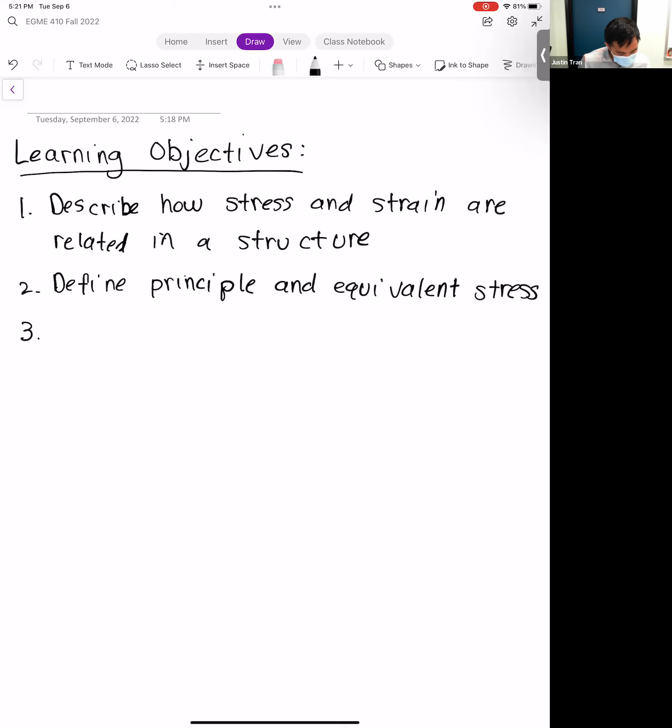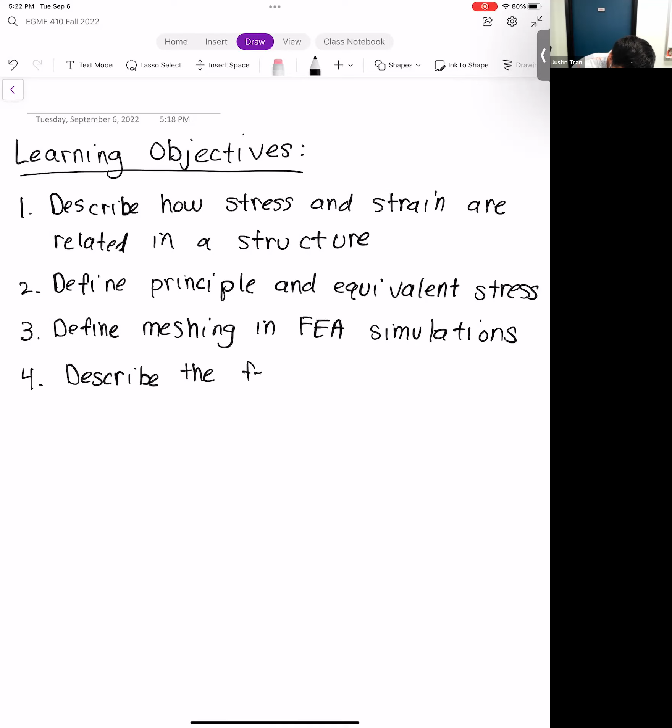I'm estimating for a demolition company. Yeah, that's exactly what I do. I go to the job site, take measurements, double check my blueprints, and then basically figure out, oh, this is the job. They fly you out to places like, oh, this place I've been around, like San Diego. And I just started, and I was kind of hoping not to have to do this already. Less than a minute's notice this time, it's like, bro.

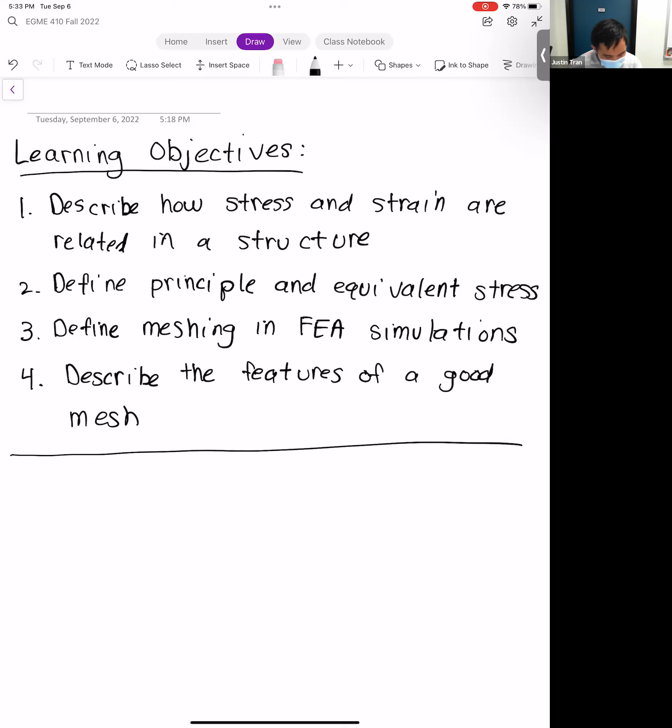Let's go ahead and get started. I'm not going to do everything in this lecture note, it's kind of my generic mechanics and strength of materials notes I use for a couple other classes, so we're going to skip a lot of the beam theory stuff at the end. I want to make sure we cover the concept of stress and strain, since that's more relevant for this class. Once we're done with that, we can move on to meshing, which I think is more fun than this. I think where we last left off, we were talking about stress and the different components of stress.

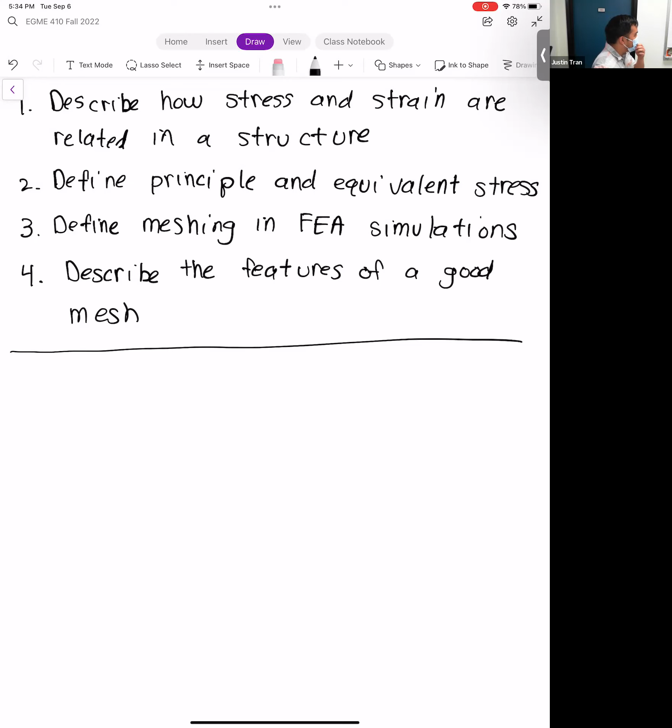Is it on over there? It's a little bit warmer here. Every time I'm in here the AC is kind of on automatic. Is there a thermostat in here? I messed with it because it's too cold. I think the buildings have been having issues, or maybe not issues, I think they've been trying to restrict the power because we're under a flex alert. So I think the AC is on but they're limiting it to try to save power, and I'm feeling a little toasty myself too. I've been here since 4 o'clock, so I think that's the best we can do. Don't run your AC all the time because it's a lot of power, but I think the school is aware of it and trying to conserve power.

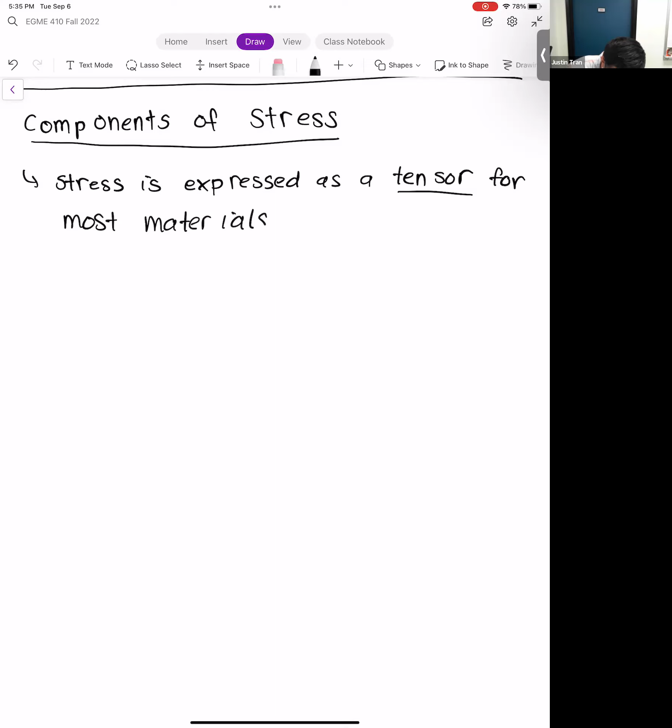Okay, so the stress. The thing I want you to remember from stress from last time is that stress is a multi-dimensional object. What we remember from last time is that stress is expressed as a tensor for most materials. A tensor quantity also basically means that it's stored as a matrix instead of a vector. So what we have is stress is a 3x3 matrix.

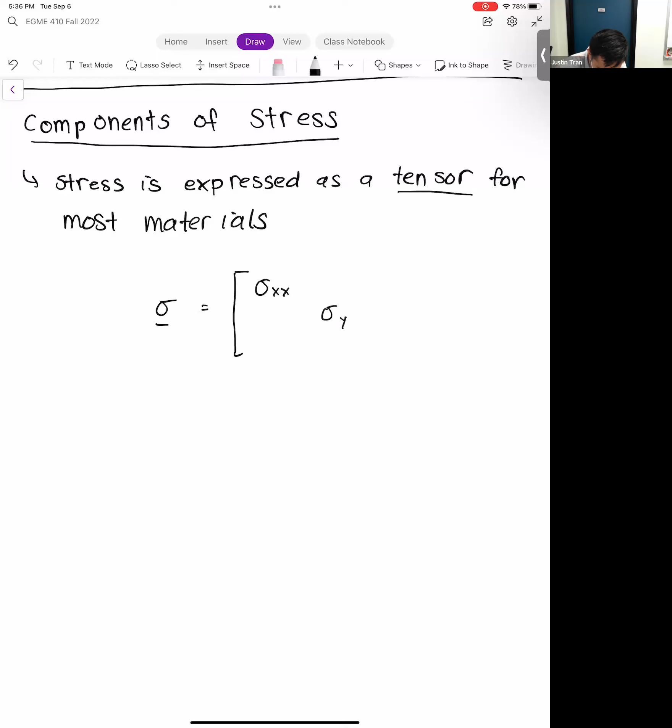On the diagonals of the matrix, we have the compressive components, sigma xx, sigma yy, sigma zz, the normal components. And on the off diagonals, we have all the shear stress components.

For the sigmas, these are the normal stress components. Taus, these are the shear stress components.

And last time, we talked about the difference between normal and shearing stress.

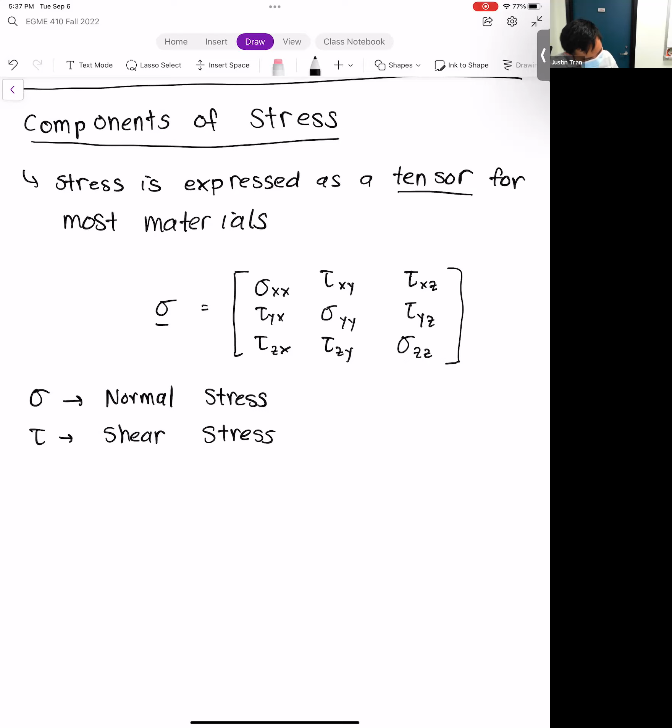I'm bringing this up again because when we talk about stress in finite element simulations, most of the time, and you can recall from activity 1, we're viewing stress as just one quantity. When we viewed the stress field within our plate, it only showed one number along with the color bars. But that oversimplifies what the state of stress is, because stress is actually comprised of all these different components.

Later on today, we're going to talk about what we mean by equivalent stress, what we mean by principal stress, and how that relates to all these different components.

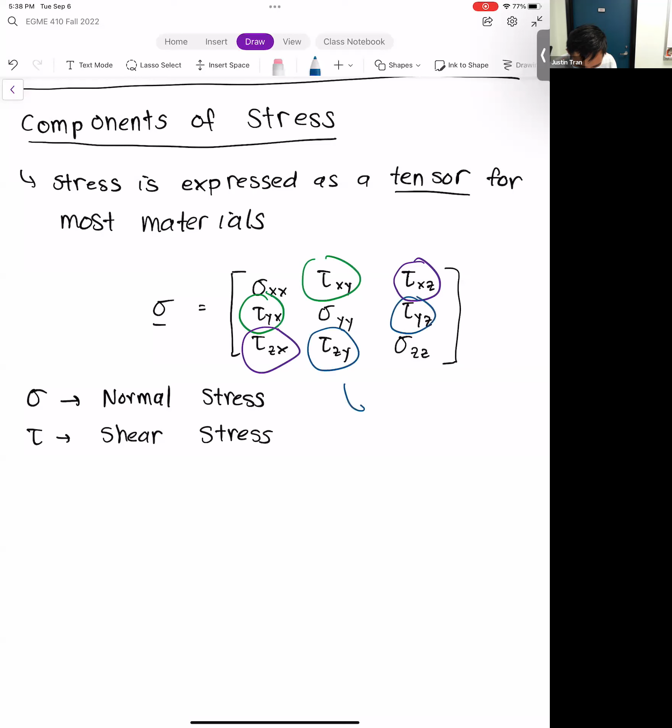In this matrix here, you can see 9 components of stress, but in reality we only need 6 because these 2 are the same, these 2 are the same, and these 2 are the same. The quantities I've circled in the same color are the same because this matrix is symmetric.

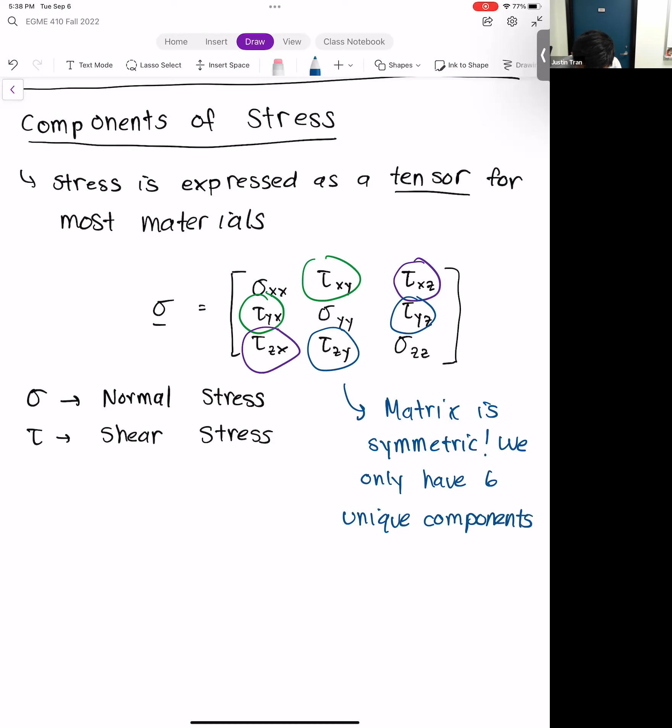So there's only six unique components. But even then, six is a lot. Even for vector quantities like displacement, we're used to those being vectors with 3 components. Considering that every single point within a structure has 6 unique components of stress is a lot, and it's usually too much for most people to view, even with a finite element software like ANSYS.

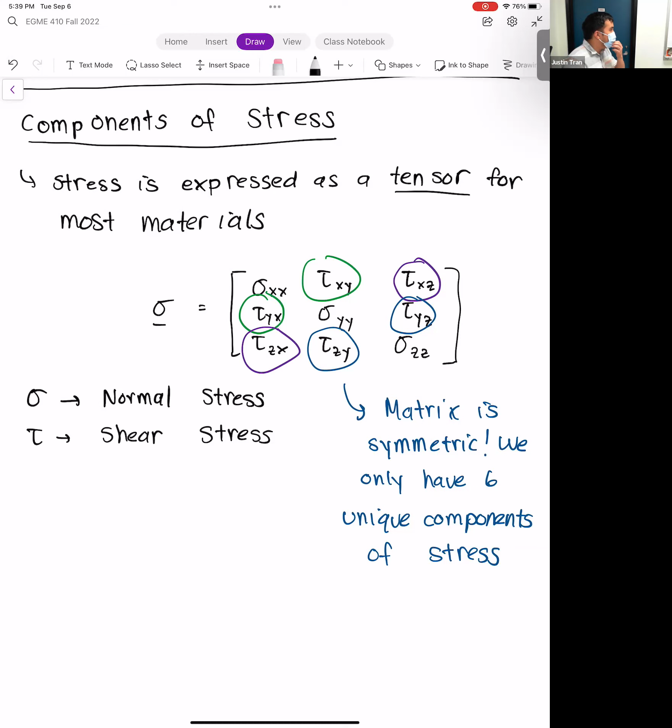So how do we take those 6 components and distill them into a single stress value that we can look at and interpret? There's a lot of math involved in that as well. So let's go ahead and jump right to that.

Let's talk about the idea of principal values of stress and strain.

Just like we said, stress is a complex thing to look at. 6 components is not easy to view at any given time. So for the sake of interpreting results and analyzing our data efficiently, we usually like to take those 6 components and distill them into singular numbers or values that we can view a lot more easily.

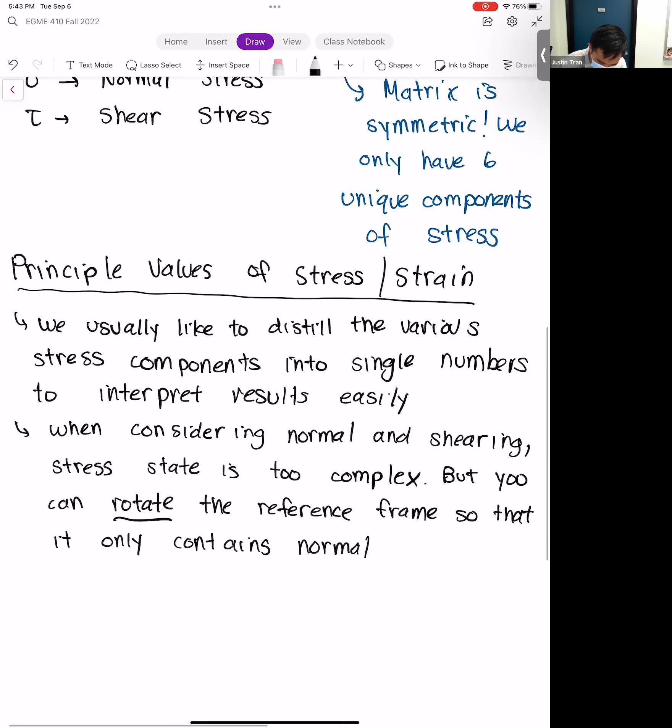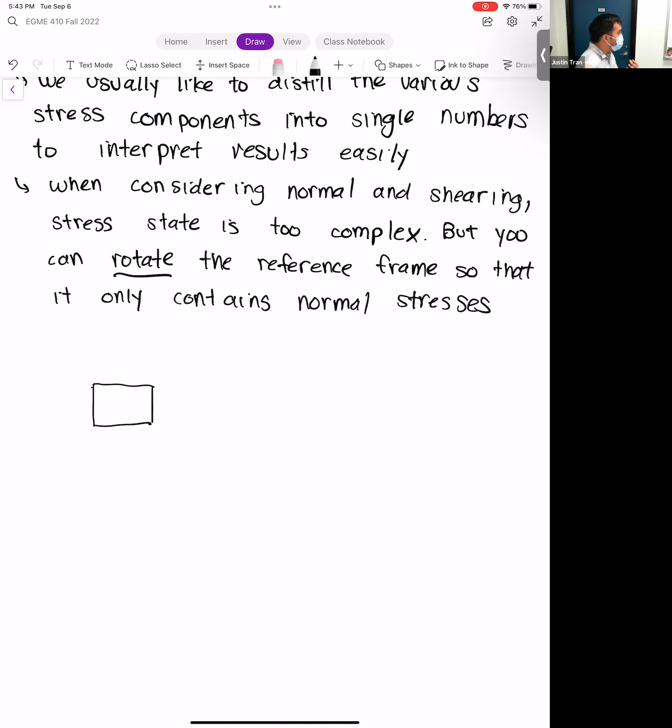I'm going to do an example in 2D because it's easier to visualize, but the same concept applies in 3D as well. If we consider just a small part in a structure, this square could be a very small particle within the structure. Normally, the state of stress here is very complex, so we have normal components.

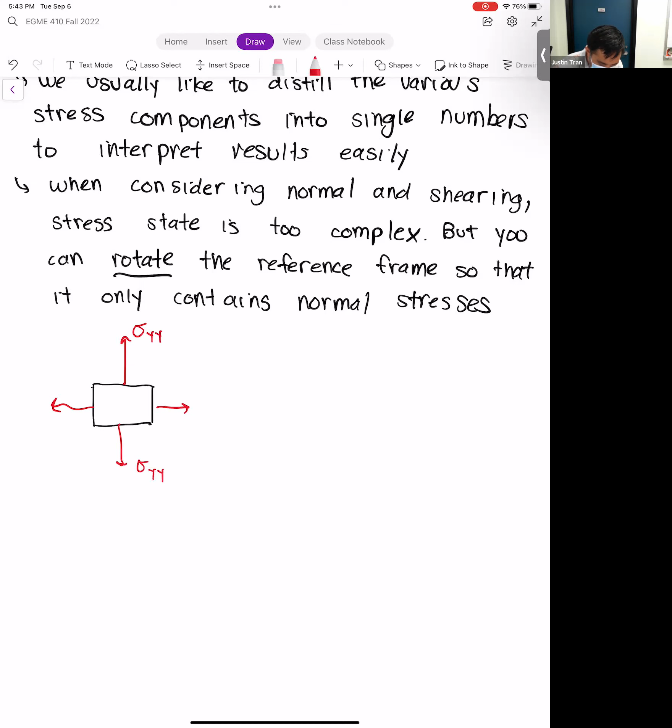This might be sigma yy, might be sigma xx. And then we have the shearing components as well, like this, like this, like this, like this. This might be tau xy, tau yx, tau xy, tau yx. So we have a lot of different stress components that we can deal with.

But if we take this particle, and I drew it as a square on purpose, and rotate it a bit — I did a 45-degree rotation here just to exaggerate it, but it doesn't have to be 45 degrees, and the degree at which you rotate depends on the stress state — if you rotate it a certain way, you can get it so that the exact same stress state can be expressed only in terms of normal stresses.

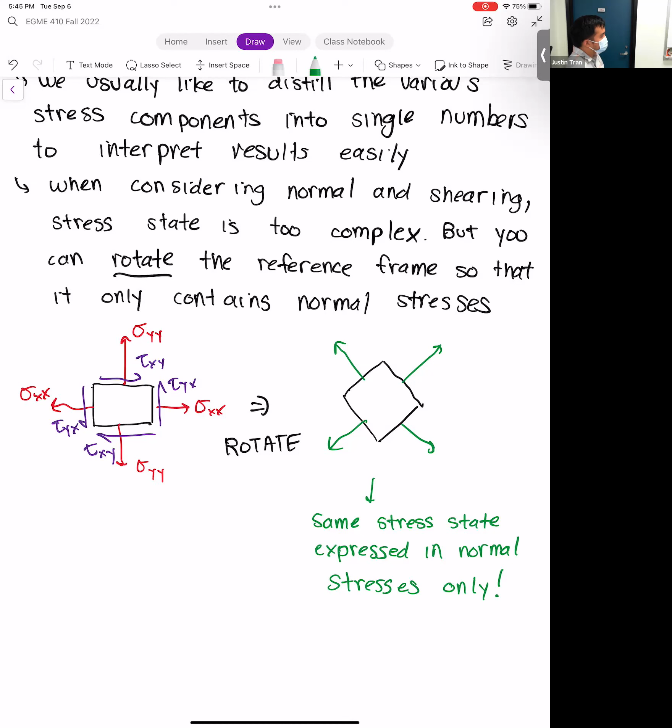I think people get confused when they view this figure, because it looks like the figure on the left and the figure on the right are two completely different stress states. The point of principal stresses and principal strains is that these represent the exact same stress state—they're the exact same object. The only thing we've done is rotate our point of view or reference frame so that the components are in convenient directions.

I always think of that Shakespeare quote about a rose—no matter what you call a rose, it's still going to smell sweet and still going to stab your hands when you try to grab it. This is the same way: if you have an object under some stress, it doesn't matter what reference frame you look at it with, the stress state is the same. It's just how you describe it that's going to be different.

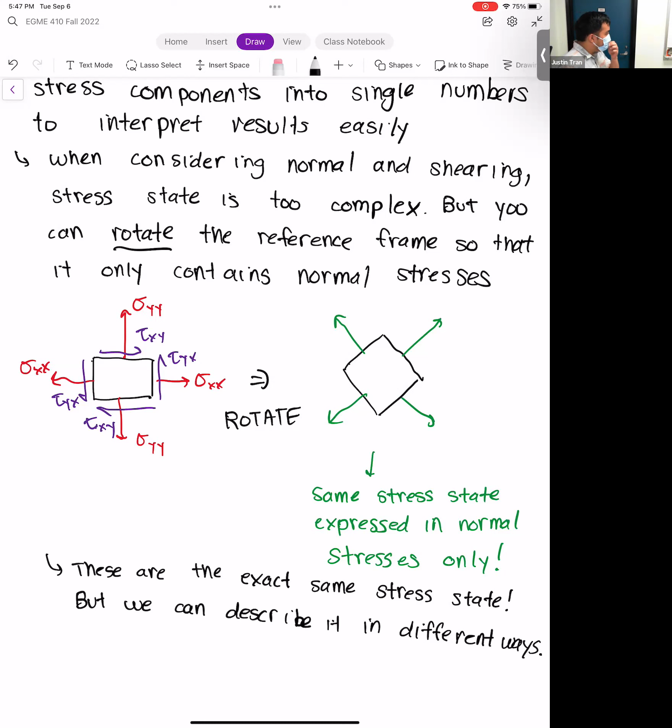It just so happens that some descriptions are a lot more convenient than others. And once we perform this rotation, the stresses that we see here on this rotated one are the principal stresses.

If you're curious about how to actually solve for these by hand, it is possible. Normally, what we have here is our stress state as a 3x3 matrix.

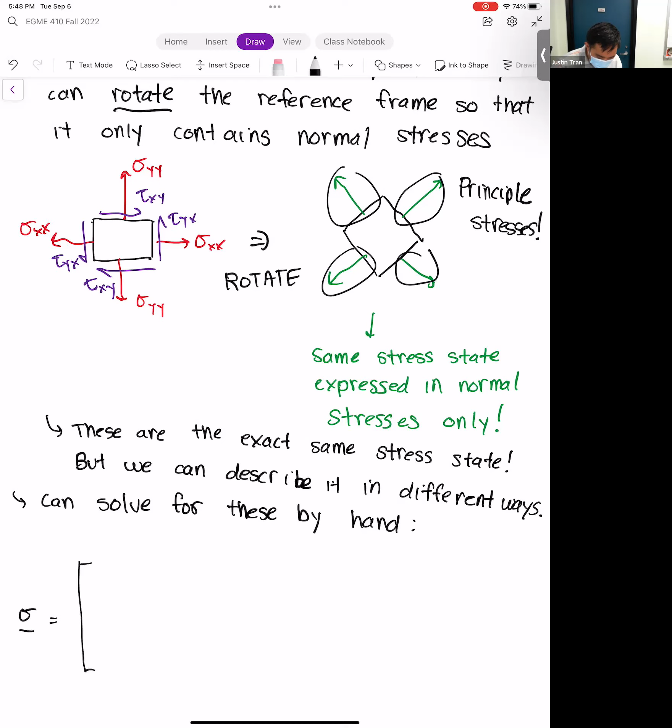I think everyone just got the text that we have an emergency flex alert. This room in particular is even warmer than normal too, because we have all the computers in here, and they're producing heat too, which makes this room extra stuffy compared to other rooms.

So that's our normal stress tensor. In order to find the principal stresses, what we do is solve an eigenvalue problem—we find the eigenvalues and the eigenvectors of this matrix.

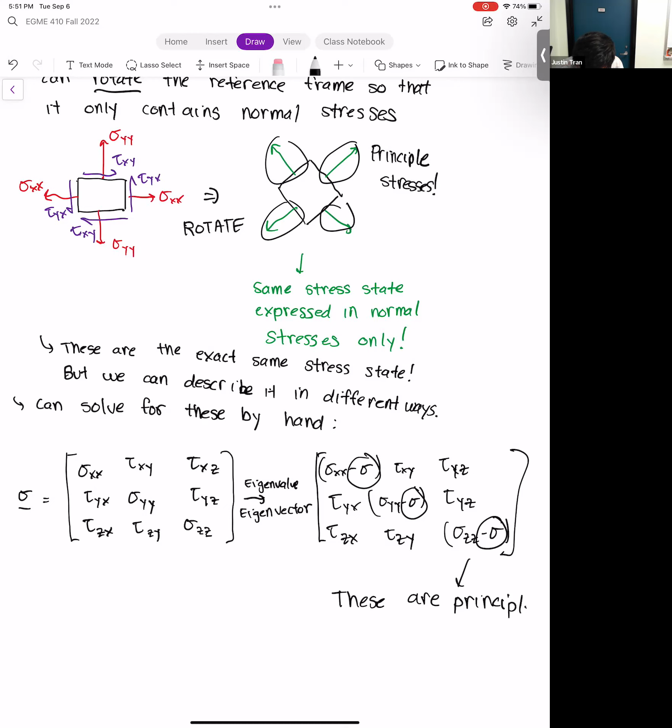So that's the idea behind principal stresses. Basically, to obtain them, we perform a rotation to get the stress state down to only normal stresses, and that's the one we display in our results. So that's one way to distill this complex idea of stress into just a simple number that we can view in ANSYS. Any questions on this? Okay, so that's principal stress.

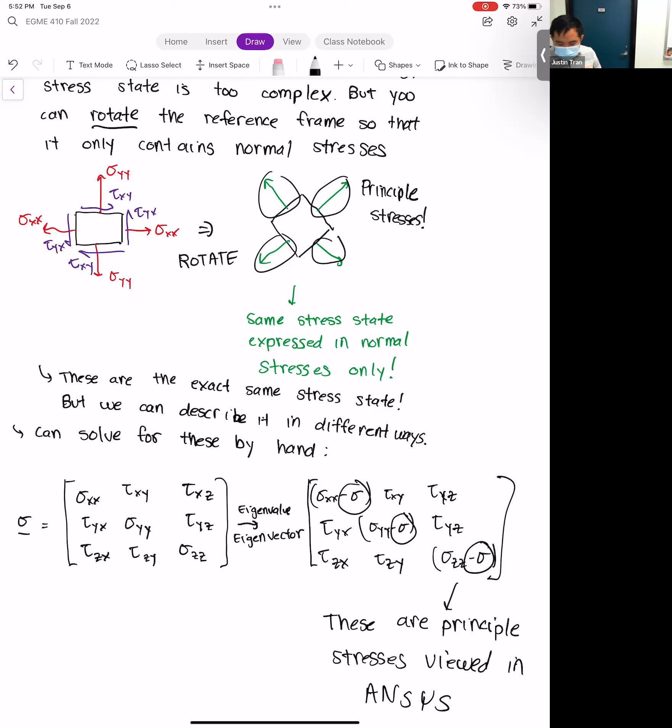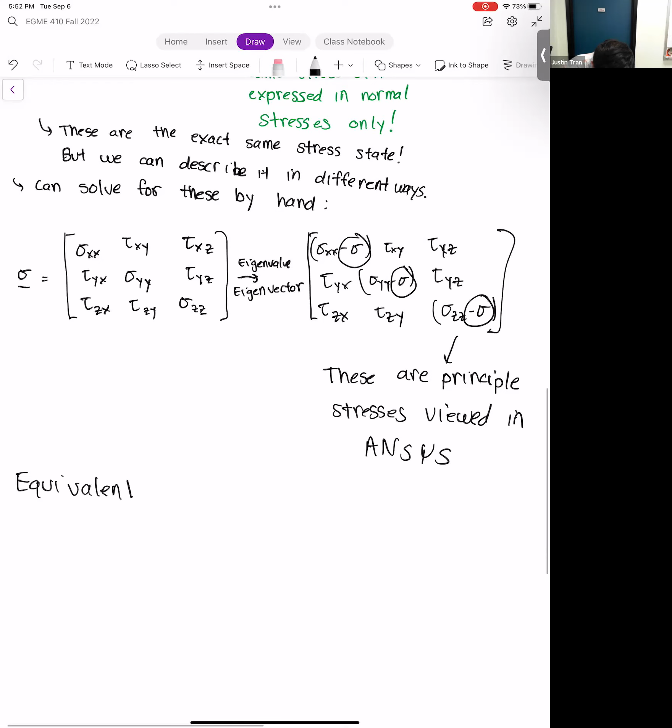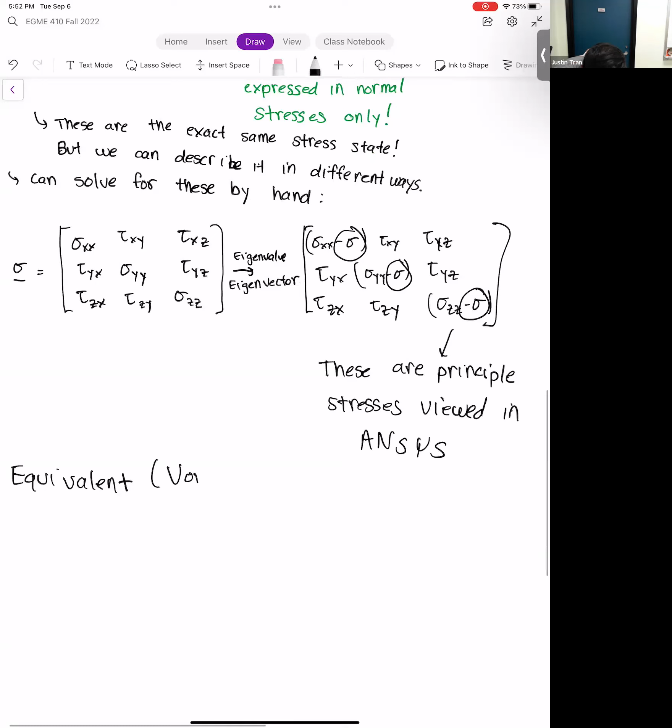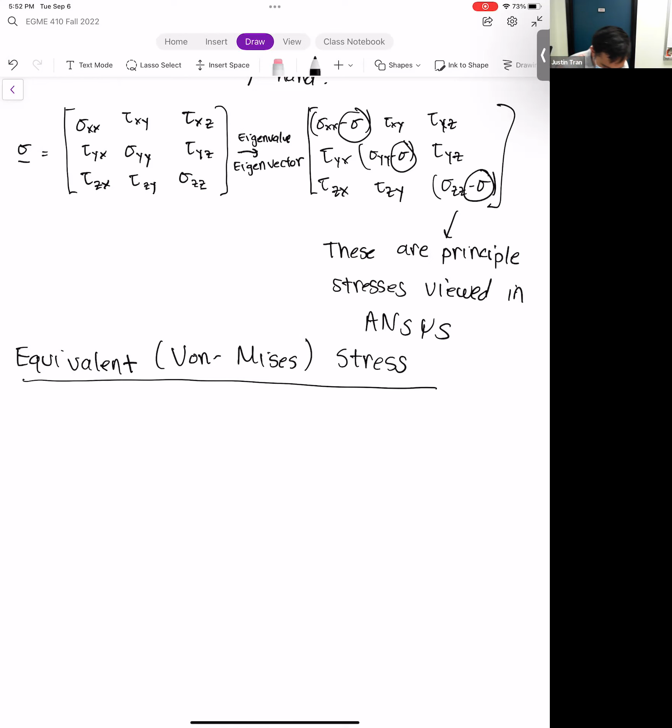So let's talk about equivalent stress. Another name for the equivalent stress that you'll see in ANSYS is the von Mises stress. The equivalent stress is another way to take this complex idea of stress and break it down into a simpler idea, or a simpler number, I should say.

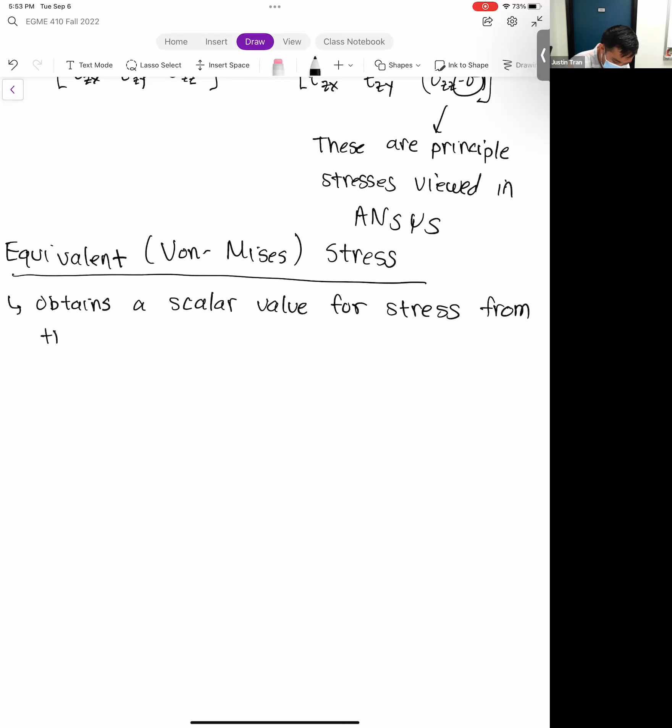Right, so it's the exact same as principal stress - we get our single value. It's just that the way we obtain it is different. The equivalent stress actually has a relatively simple formula, so we don't have to solve an eigenvalue problem. We just take our 6 components and plug them into this formula.

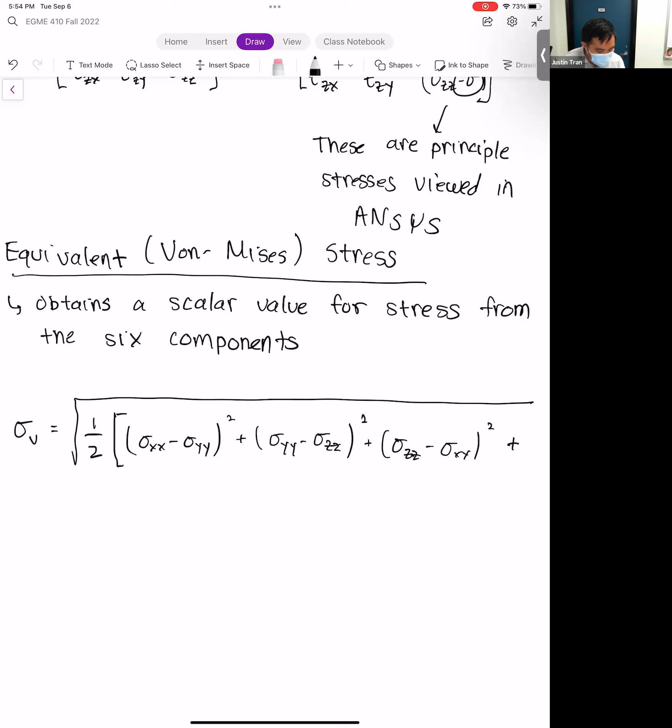The formula for the von Mises stress is given by the square root of 1/2 times: inside this square bracket is all the normal components of stress, sigma xx minus sigma yy squared, plus sigma yy minus sigma zz squared, plus sigma zz minus sigma xx squared. Then we have all the shearing components as well, all under the square root: plus 6 times tau xy squared plus tau xz squared plus tau yz squared.

So it's a rather long formula, not that complicated. But what you can see is that we obtain just a single number for stress. The idea behind this is like the concept of magnitude of a vector - if you have a vector you can find the magnitude using the distance formula. This is kind of the same thing, kind of the 'magnitude,' in quotes, of the stress tensor.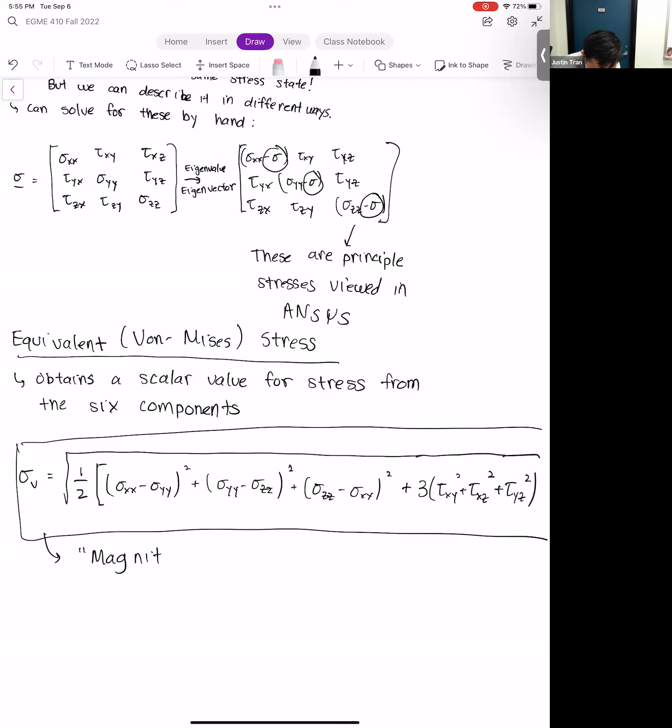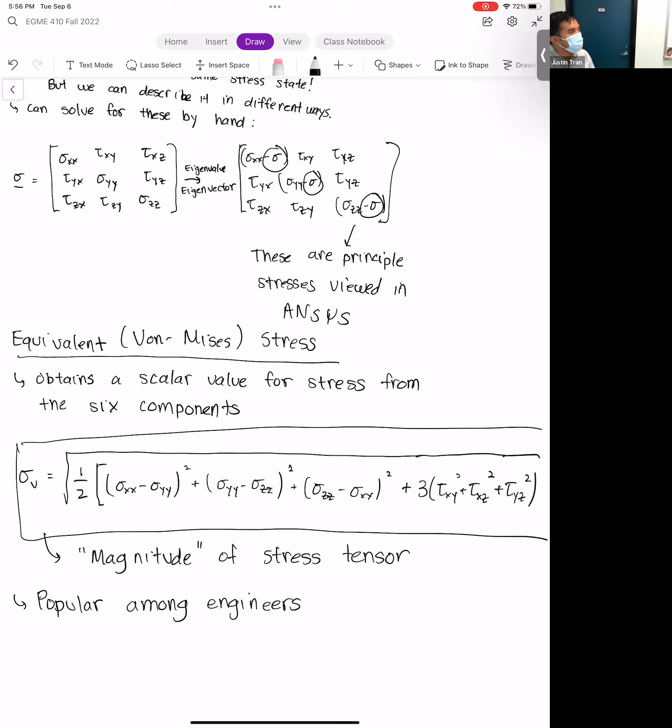For most engineers, the concept of magnitude is something a lot of people understand. So when viewing stress from a finite element simulation, people prefer to use the equivalent stress because that's exactly how it is - they see stress as this multi-component entity, and taking its magnitude is a simple concept most engineers are familiar with. It's so popular that we decided to start measuring things like failure and yield strength according to this equivalent stress.

On Thursday when we do our activity, I'm going to give you a part, and in addition to the material of that part, I'm going to tell you at which equivalent stress the part is going to break. So what you're going to do is run the simulation, compute the equivalent stress, and then see if that equivalent stress exceeds the yield strength that I give you.

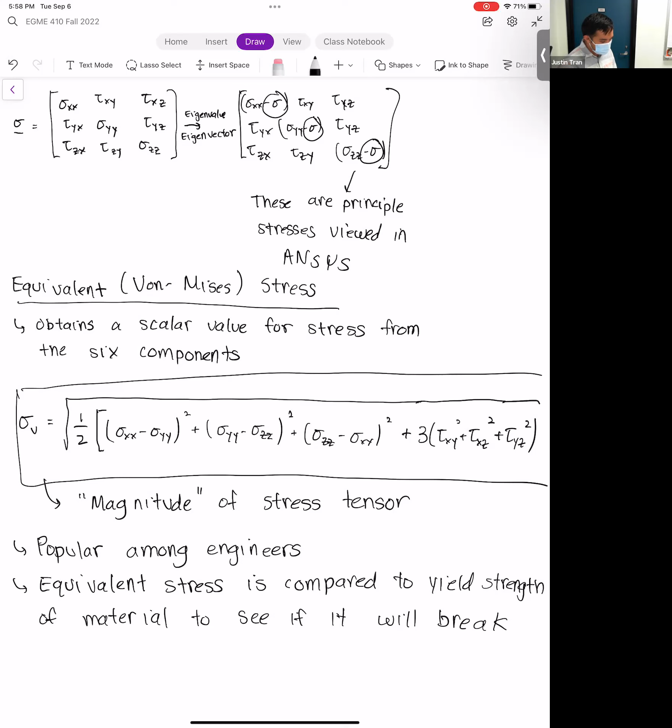A lot of times, if you're doing failure analysis or stress analysis in ANSYS, the one you're going to want to look at most of the time is equivalent stress, because that's going to tell you with pretty good accuracy if the part is going to fail or not. That's why, for most of our activities, I'm going to ask you at the very least to show me the deformation field and also the equivalent stress field, because that shows the magnitude of the stress.

Any questions on equivalent stress? I'm not sure what you mean by Tresca. That's someone that took Dr. Carp. Oh, okay, I see.

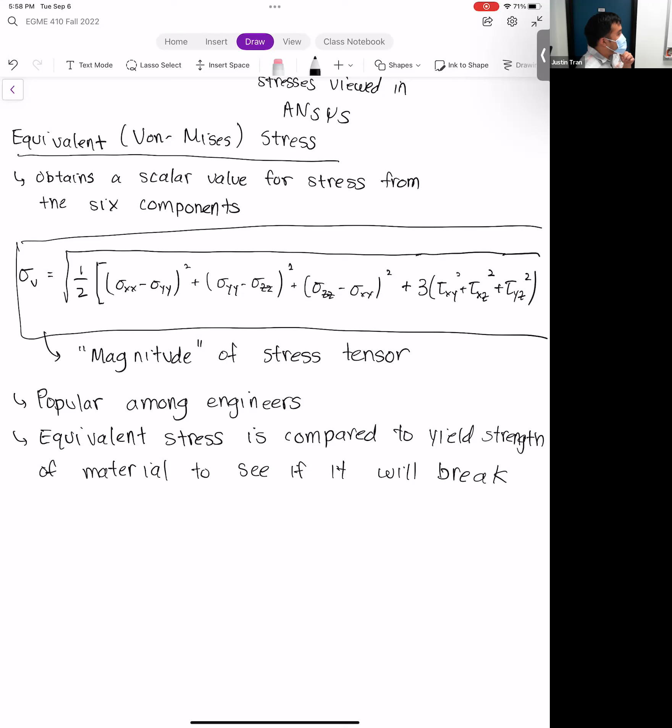It wasn't bothering me last class, but now that someone mentioned it this class, it's starting to get to me a little bit. I'm kind of sweating up here.

Okay, so the last thing I want to go over in mechanics and strength of materials is stress-strain relationships. I think at the end of class on Thursday we started talking about strain a little bit - we talked about how the strain inside of a material is directly linked to the amount of stress that it experiences as well.

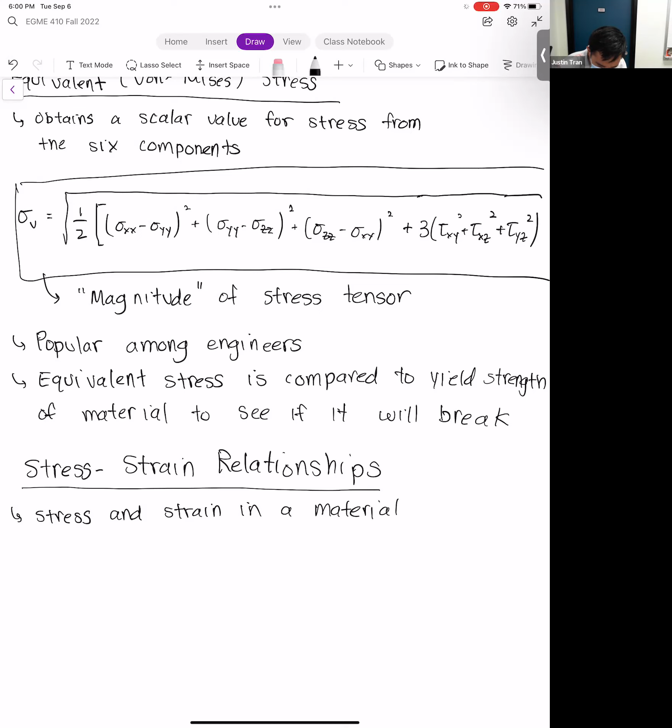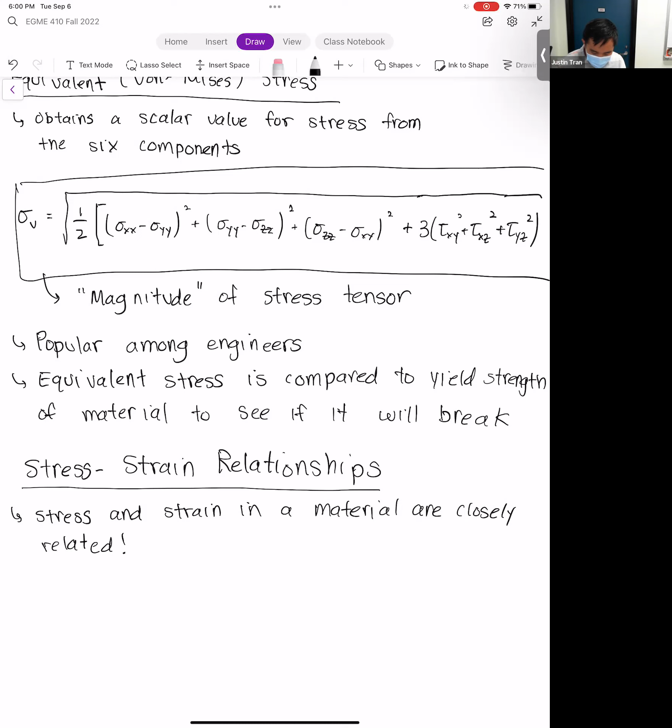And the degree of their relationship depends on what kind of material you're looking at. And so for the simplest case, and the case that we'll be looking at a lot in this class, is a linear relationship.

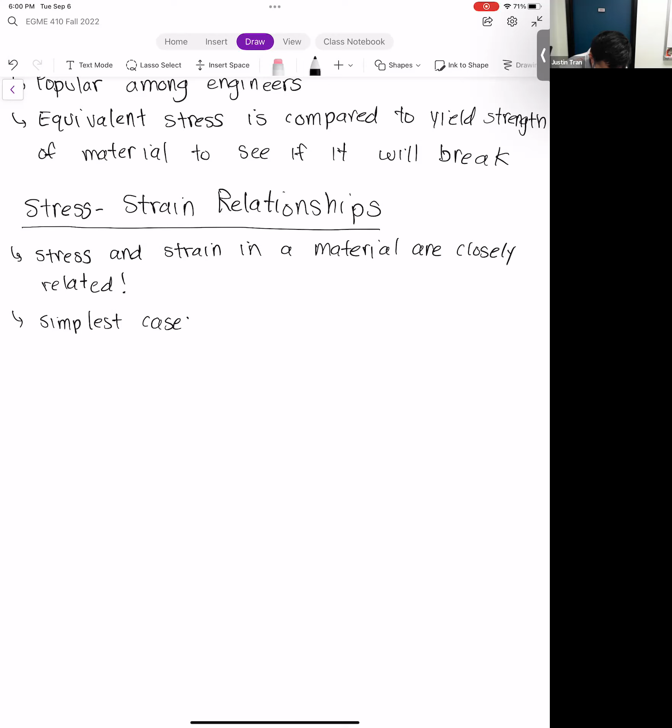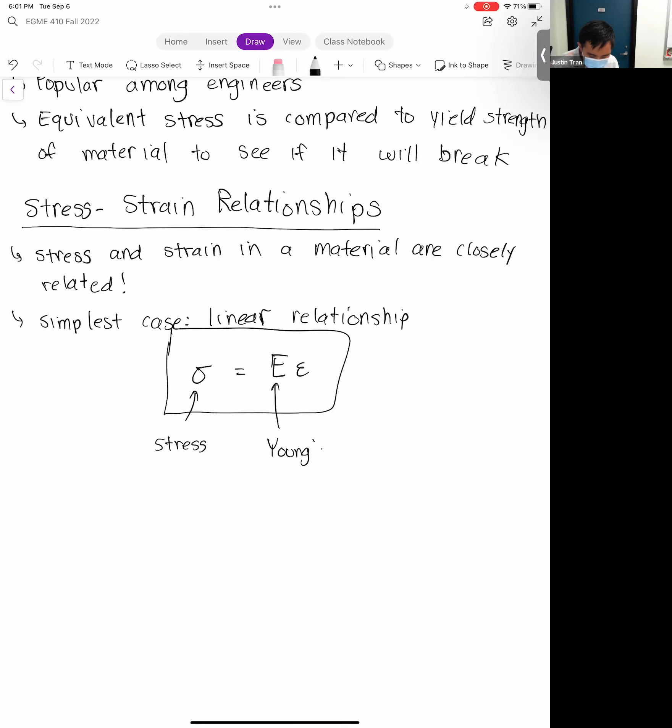Under a linear relationship, the stress and strain are related by just a straight line. This is probably the equation you've known the most: stress is equal to E times epsilon, where sigma is the stress, E is the Young's modulus, and epsilon is the strain.

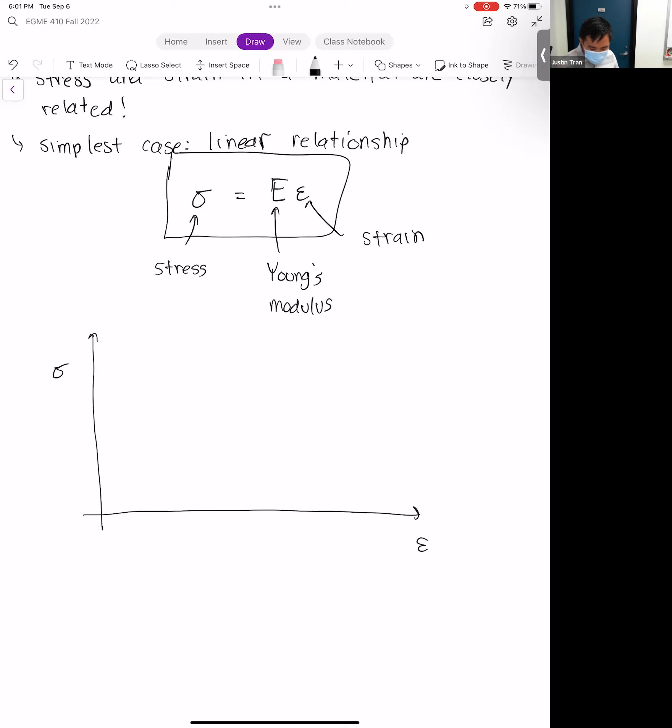A linear relationship like this leads to a linear line. So if we draw a stress-strain curve, we have sigma on the y-axis and strain on the x-axis, and all we have is a straight line where the slope of this line is E.

Just like we talked about last week, when you have a linearly elastic relationship like this, that means the deformation or strain you see in the object is directly proportional to the amount of load that you apply.

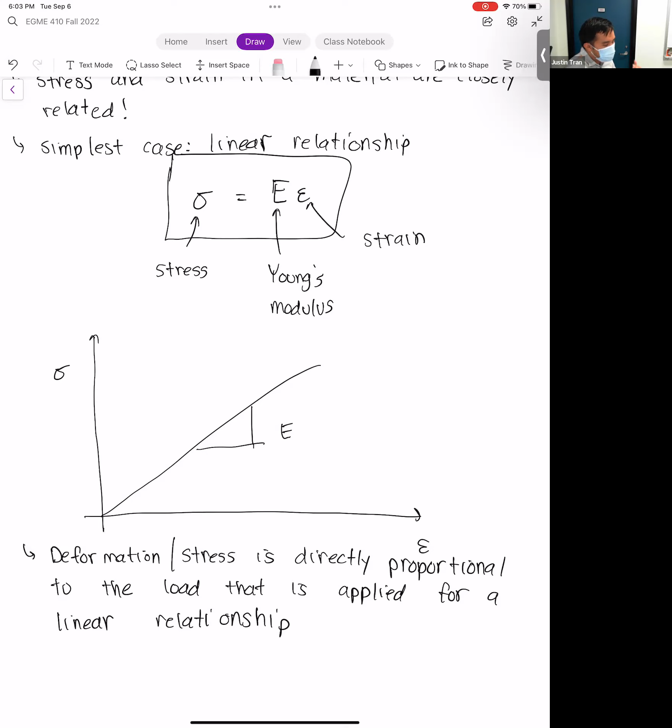If you apply double the load, you'll get double the deformation, double the load, double the stress. The same thing for half and a third and stuff like that. This type of relationship works well in certain situations.

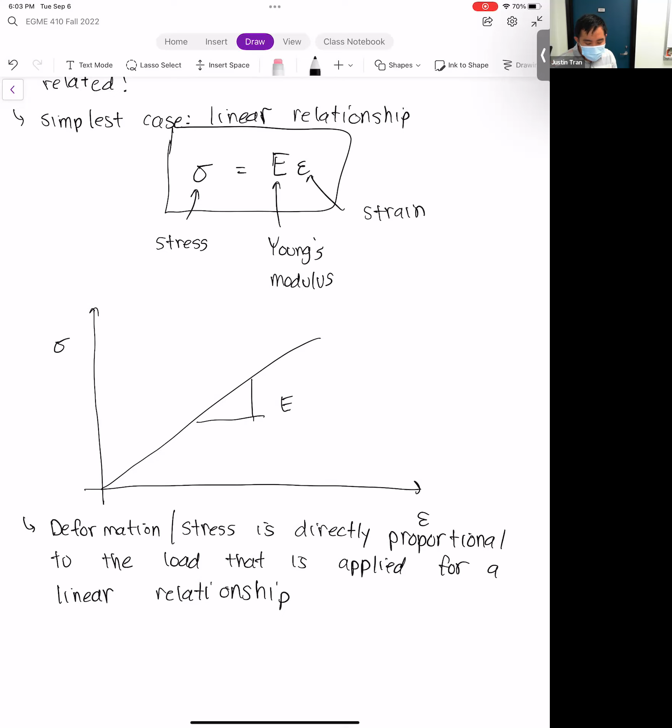Luckily for us, a material we use a lot in engineering is metals. Metals are typically assumed to be linearly elastic. So if you're using something like steel or aluminum, that metal is going to behave just like a linearly elastic material.

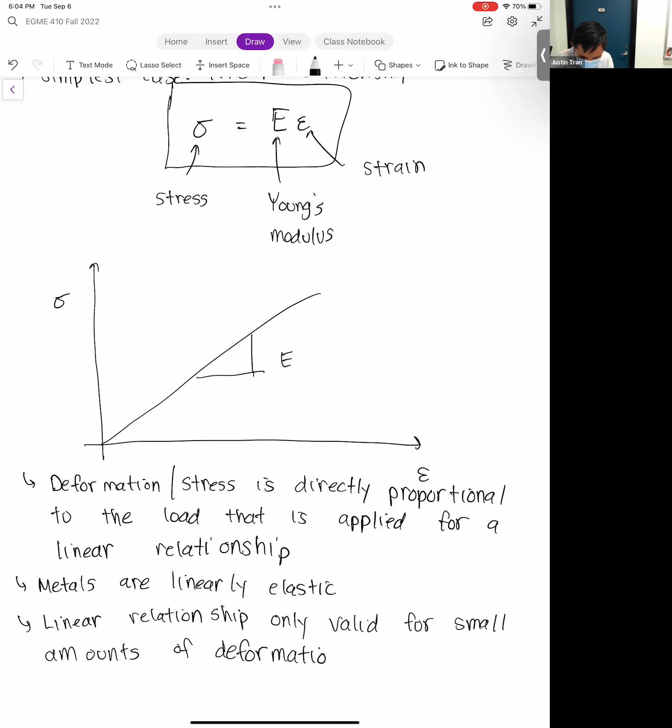But even for metals, this kind of linear relationship is only valid for small amounts of deformation. Once you get to higher levels of deformation, what you start to see is plastic deformation, which gets a bit more complicated.

Let me just write down about plastic deformation, and then I think that's all I want to review about strength of materials, and then we can start talking about meshing.

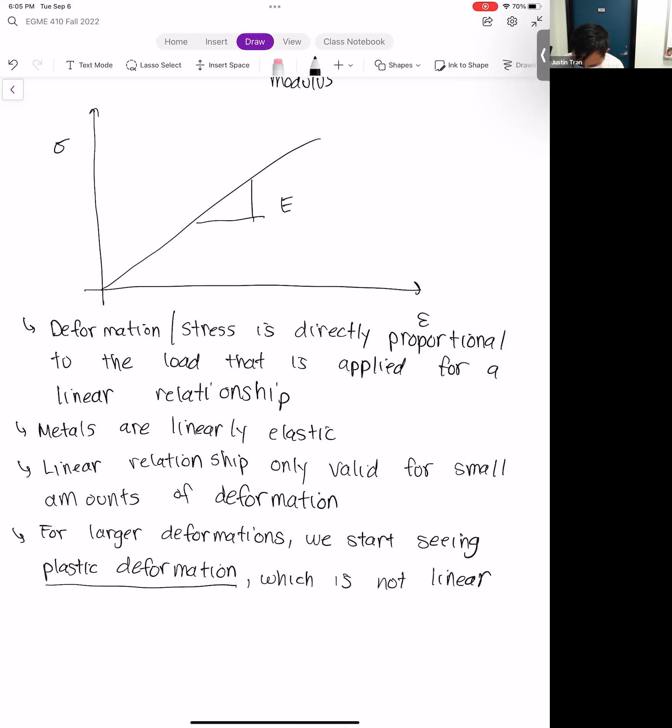In ANSYS, there's actually a setting where you can turn on what's called large deflections. When you turn on the large deflection setting in ANSYS, it'll start to account for things like plastic deformation, where the stress-strain relationship is no longer going to be linear.

The only thing with large deflections is that when you turn it on, it actually increases the cost of your simulation. For the cases we're going to look at, that increase in cost is pretty negligible, and you probably won't even notice it. But for much larger cases, it starts to make a difference.

So it's usually a pretty real decision people have to make if they want to turn on large deflections, or just how much complexity they want to put in their simulation relative to the cost.

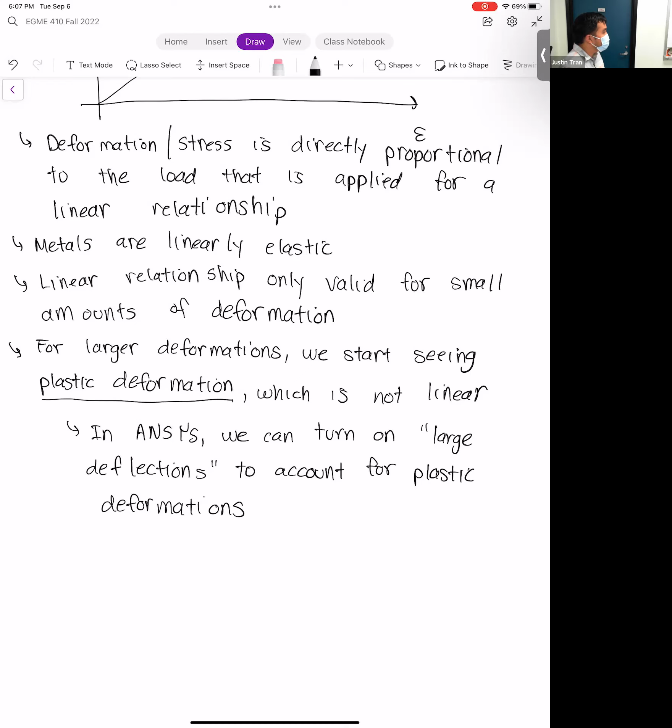Any questions on this stuff before we move on to meshing? So the only reason you wouldn't want large deflections enabled is so it's easier to run.

Exactly. We'll talk about cost a lot more once we talk about meshing. But for the types of simulations we're going to run, turning on large deflections might be the difference between waiting 10 seconds for your simulation versus waiting 15, which is pretty negligible for most people. But for much larger simulations with millions of elements, it could be the difference between a few hours to a few days, which is a lot more significant.

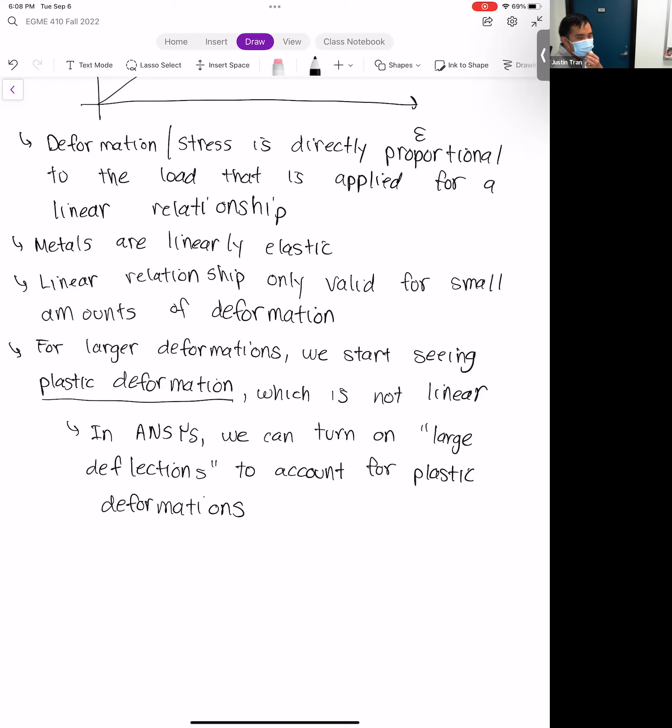Okay, all right. So let's go ahead and move on. The next thing I want to talk about here is meshing.

For this lecture, and I think we'll probably do meshing for one more lecture, we're just going to go over the basics of meshing, just enough to introduce the ideas to you and get the basic concepts down. We'll revisit meshing later in the semester, because there's quite a lot to talk about with meshing. But first, I just want to talk about the basics, what you're looking out for, what a good mesh looks like, and some of the basic settings you can use within ANSYS.

So we're shifting gears quite a bit. We just finished talking about strength of materials, and now we're going to a very heavily FEA-specific subject. Let's remind ourselves what meshing is: meshing is the act of taking a complicated geometry and breaking it up into much simpler shapes.

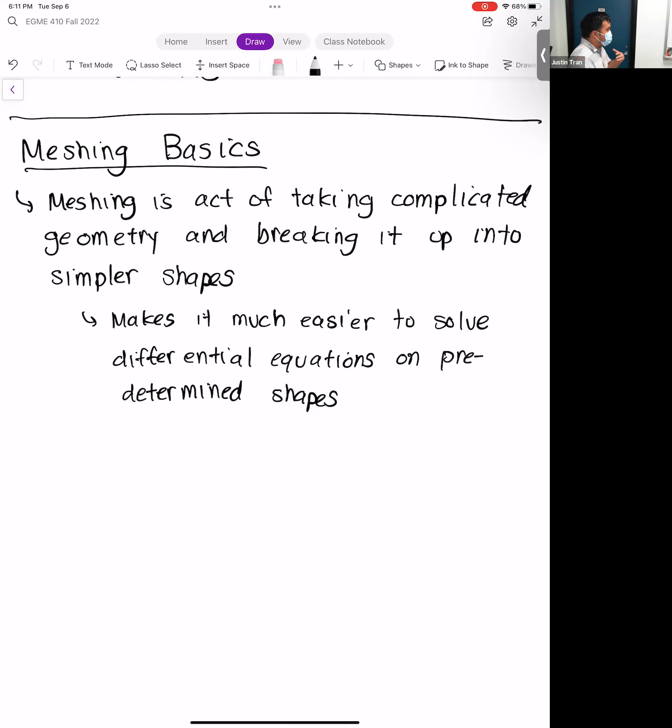Because of how meshing is, there's no one best way to mesh an object, and to that end, there's no perfect mesh for an object.

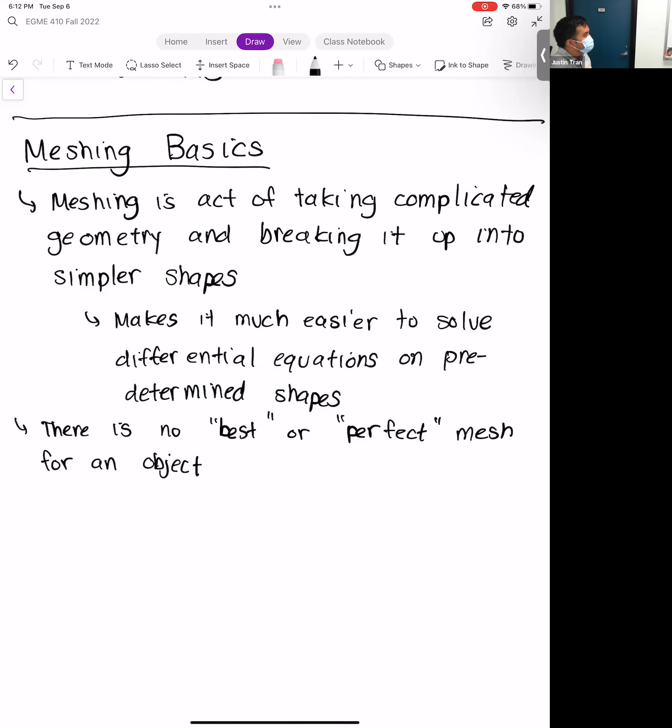Because the mesh that you generate is not just a function of the geometry itself. It's a function of the type of analysis that you want to run, how much computational power you have, and how much accuracy you want. So there's a lot of factors that go into what a good mesh is. But with that said, even though there's no best or perfect mesh, there are meshes that are better than others.

I had a math teacher in high school who was very stingy with his compliments, but the best compliment he would give is to tell you that this is better. I remember he would be checking my homework and say, 'Wow, Justin, this is better than what you did before.' He had a stamp that said 'This is better,' and he would stamp my homework with it, in sparkly letters. I still remember that to this day.

Again, meshing is a very rich topic. You could probably spend half or three-quarters of a semester talking about all the different shapes, intricacies, and nuances. It goes deep. Honestly, I have a lot to say about meshing in general, but this is a limited class, so I'm just going to give you the most important details. Just know that it goes really deep. If you really want to talk to an FEA nerd, talk about meshing—he or she will have much to say about it.

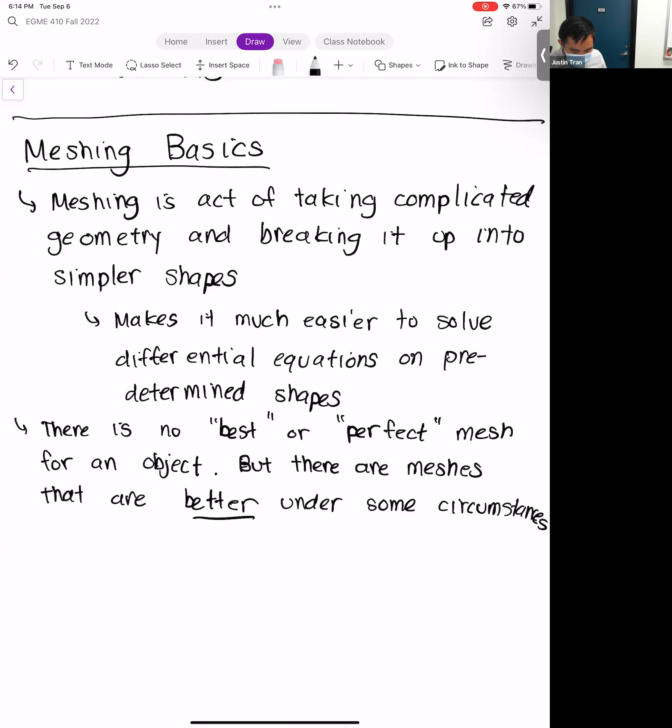Today we're going to start talking about what are the characteristics of a good mesh, and what exactly our goal is in terms of meshing.

As complicated as meshing is, I think it's pretty easy to come up with a definition for what a good mesh is. To put it simply, a good mesh is one that will give you an accurate finite element solution result with as little cost as possible.

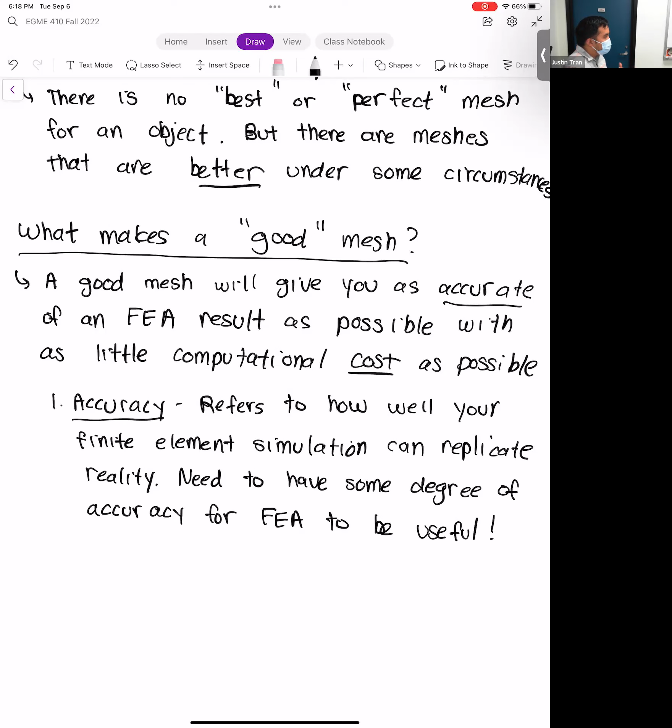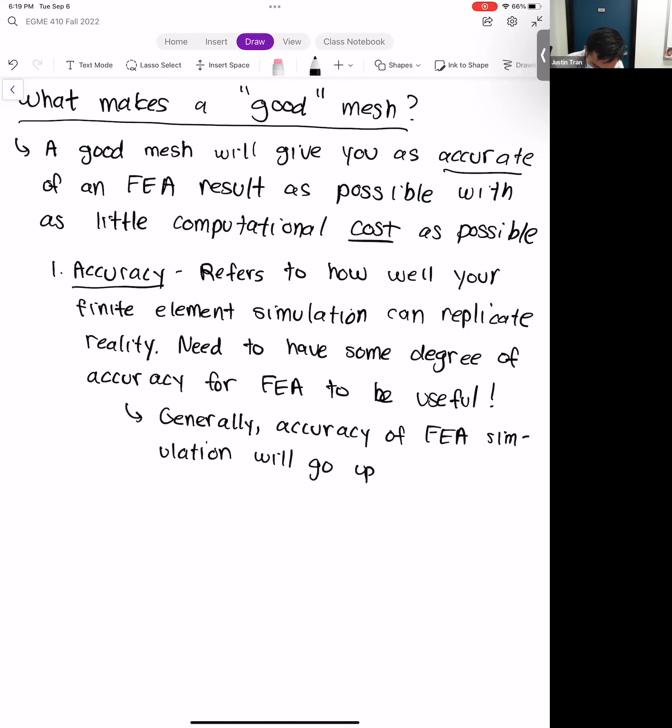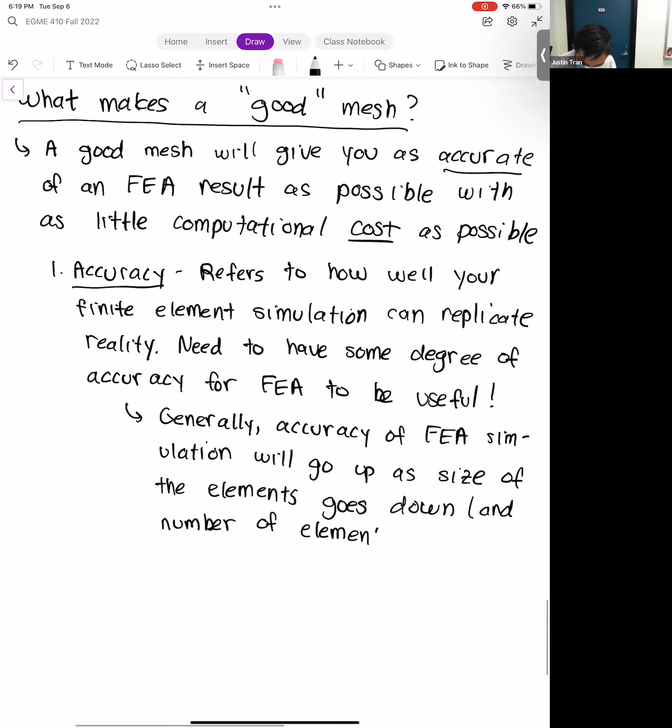So the thing about accuracy is that it's not an on or off kind of thing. It's not something that you're accurate or not—it's actually more of a sliding bar, a grayscale thing. Generally speaking, the accuracy of your finite element simulation will go up as the size of the elements goes down. And as the size of the elements goes down, the number of elements also goes up. So more elements, more accuracy.

There's a graph that you can make for any FEA simulation. On the x-axis, let's describe the number of elements, and on the y-axis, let's describe some quantity of interest—say, deformation or stress. That's the stress we're trying to basically emulate inside the FEA simulation.

In the simulation, let's say we have a true value of stress—say we ran this physical situation in reality and measured the stress, and it's this value right here. This dotted line is the true value of stress, what you'd actually observe if you ran the situation in reality. Our goal with the FEA is to get as close to this as possible.

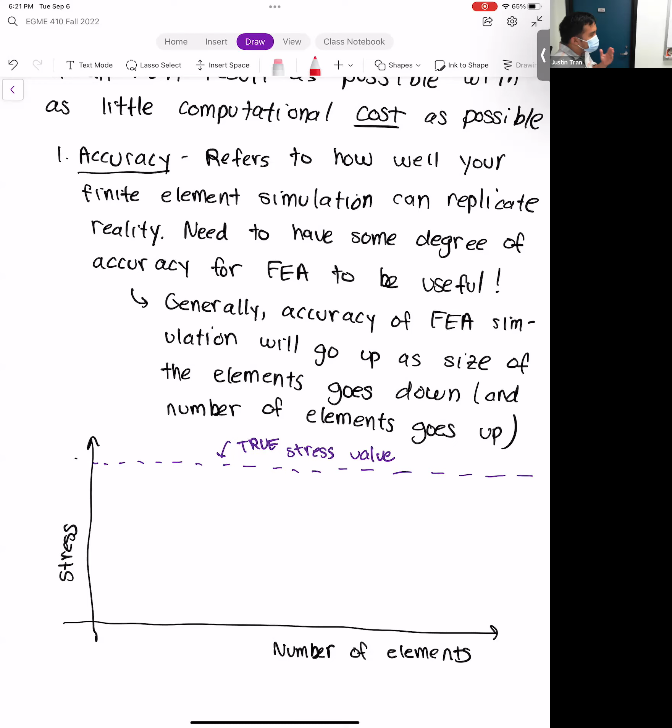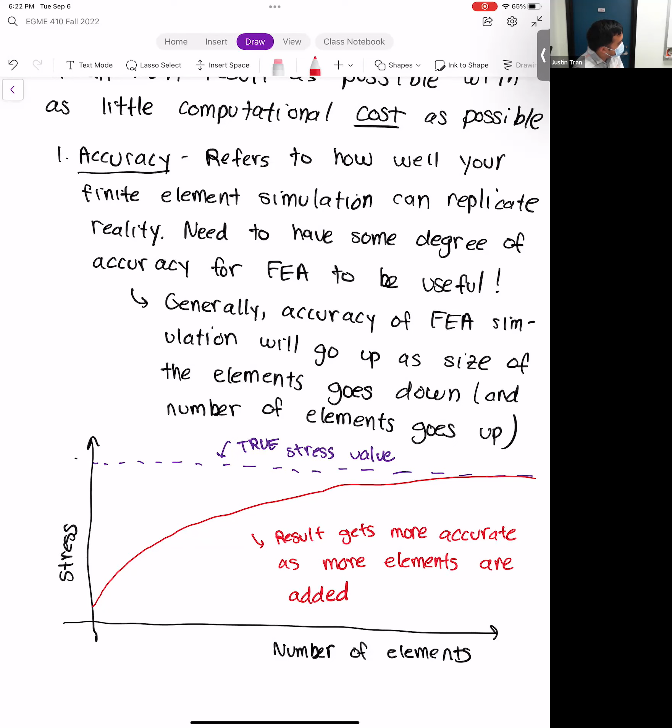Generally what you see is that as you add more elements, your FEA result will creep closer to this line. For a very small number of elements, you might start very far off, but as you decrease the element size and increase the number of elements, you'll get closer and closer to reality, until eventually the two lines basically intersect. That's generally a trend you can expect for most simulations.

Any questions on this?

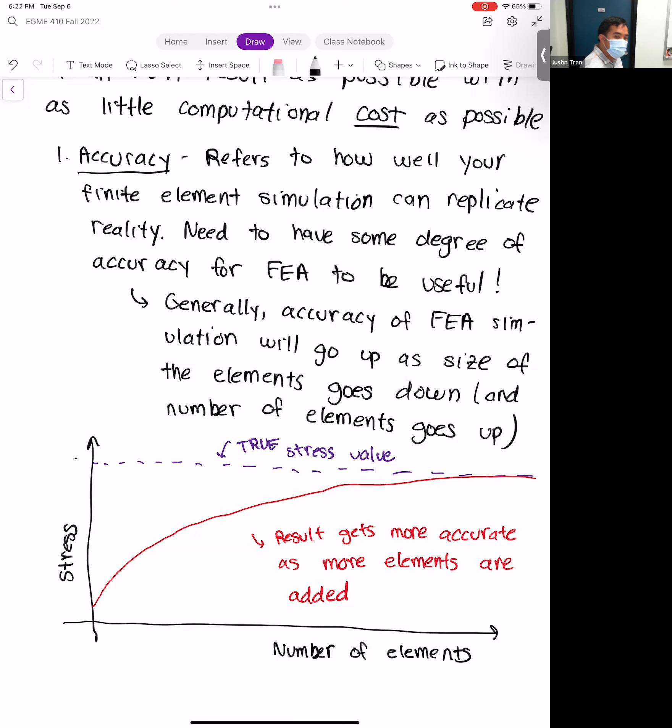Another good way to think about accuracy, or another good analogy, is trying to approximate a curved line with a bunch of straight lines. This should tell you why adding more elements will make the simulation better.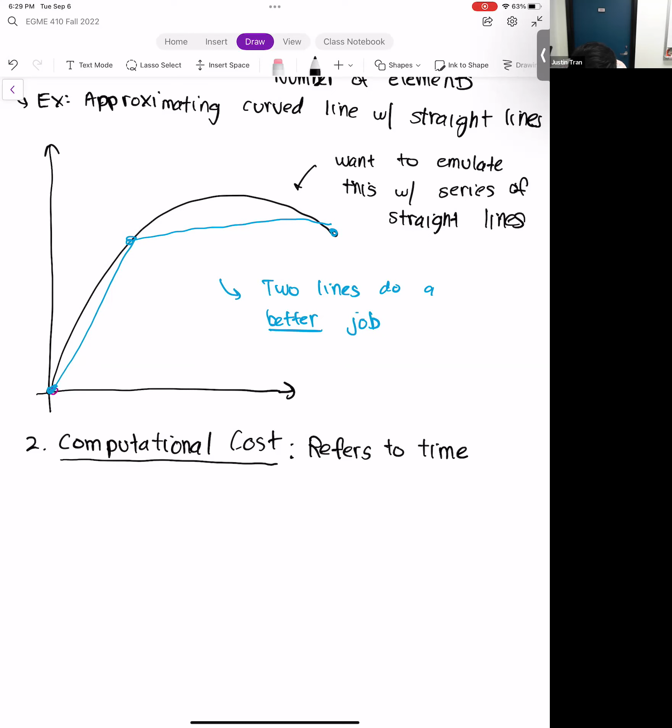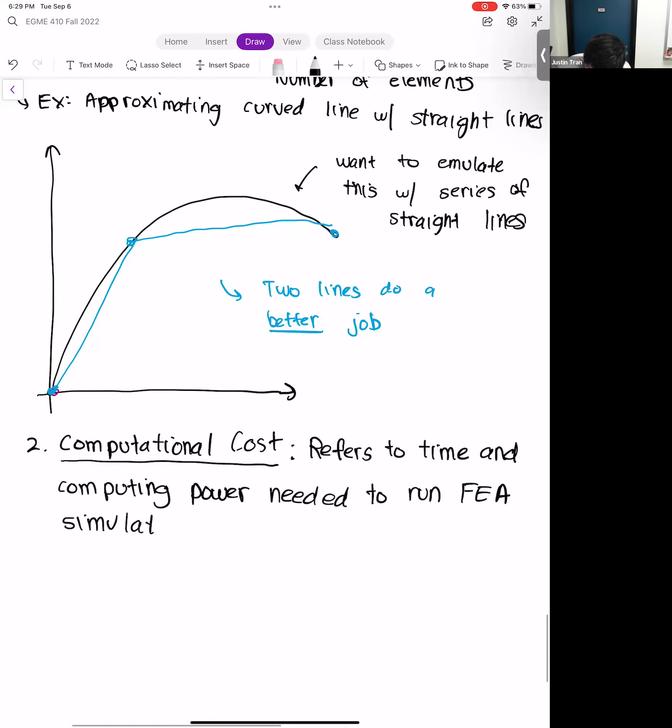Computational cost is the amount of time and the amount of computing resources that are required to run your simulation. How this relates to elements is that generally, as the number of elements in your FEA goes up, the cost is also going to go up as well.

So other than time being a cost, would it be like the equipment you're using to run ANSYS on, that cost would go up? It's not that you need to, you can actually, in theory, run any simulation on any computer. It's just that some computers are going to run it way faster than others. Because at the end of the day, the only thing you really need is a computer that can add, subtract, and multiply numbers. Some computers, if you have a more powerful processor, if you have multi-cores, it's going to do those a lot faster than a potato, right?

So then the cost is just the time? Yeah, but the reason I put computational resources there is that people invest a lot of money in getting good computers too, so that happens as well. I think intuitively this kind of makes sense: the more elements that you have, the more mathematical operations the FEA has to do in order to get the result.